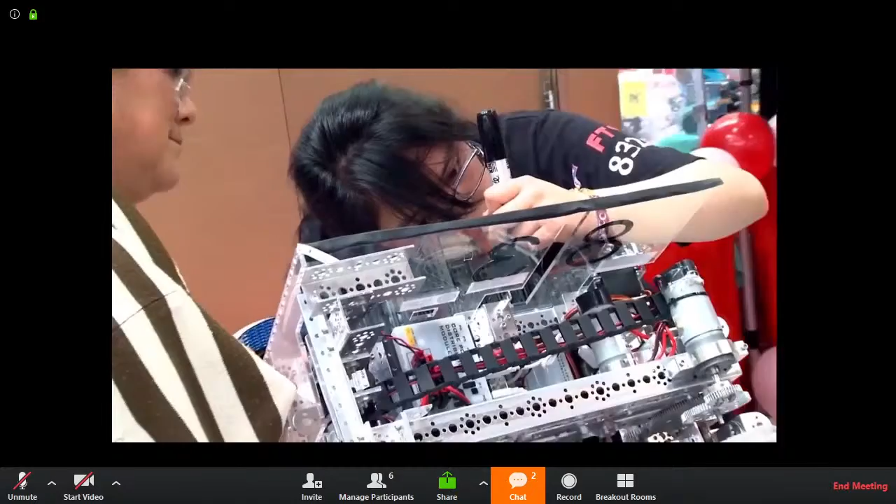In First Tech Challenge, students are developing a broad range of skills: manufacturing, hardware, troubleshooting, but there's also a lot of things you learn that you wouldn't necessarily think about - people skills, problem-solving skills, helping one another, helping other teams. The program draws so many students who just want to do marketing, who just want to do fundraising. You need to do fundraising because you need to buy kits and parts and everything you need for the year. That's a great thing that the kids learn very early on.

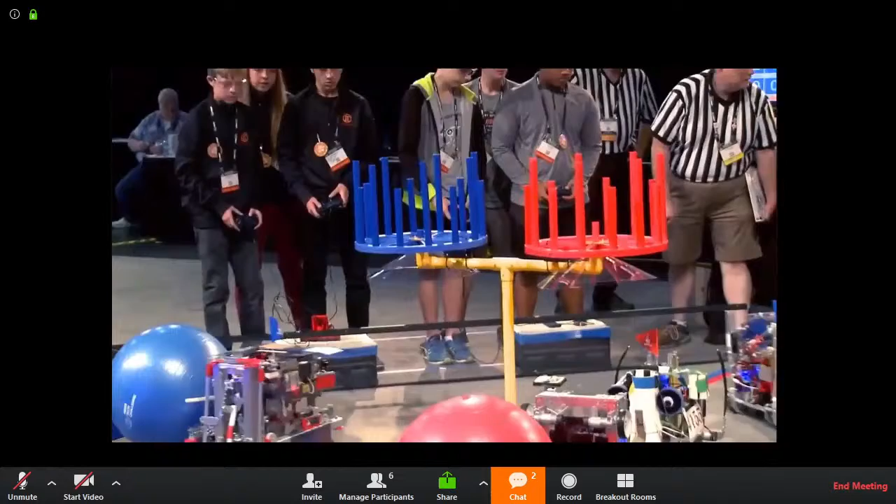The model of FIRST has provided incredible opportunities for students to interact with professionals. Whenever I ask my mentors a question, they always flip the question around and ask, where would you find the answer to that question if I weren't here? They slowly built my confidence up so much more to a point where we weren't asking them questions, we were just going. Each team has to compete at a local event, win awards at the local event, and then they're able to move on to the First Championship.

You walk into the room and there's that smell - the smell of robots. There's different languages, different culture. It's just the best thing ever. I think it's incredibly important for youth to see careers in science and engineering as a possibility for them. High school participants have access to over 80 million dollars in scholarships from colleges, universities, and technical programs. First Tech Challenge is one of 4 engaging FIRST programs. First, in one word: wow. Fun! First is inspiration. First is amazing. First is hope.

And now on to this year's game. It's called Ultimate Goal this year.

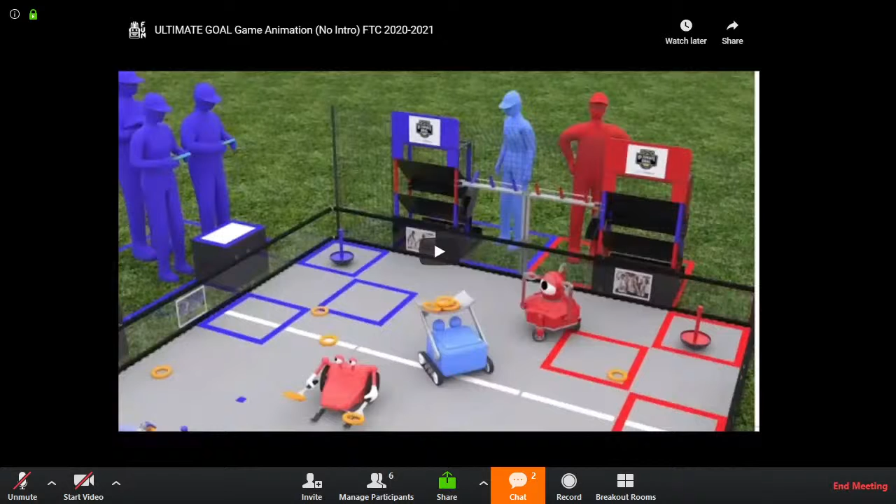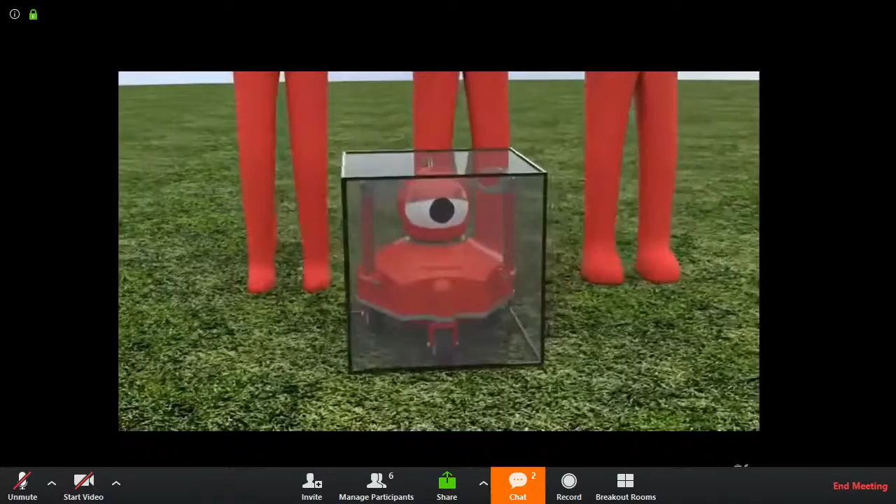A team consists of up to 2 driver operators, a coach, a human player, and a robot. The robot must be built from materials specified in the game manual and fit within an 18-inch sizing tool, but may expand after the match begins. Each match is played with 4 randomly selected teams, 2 per alliance. Each alliance is allowed only 1 human player. Your opponents for one match may be your partners for another.

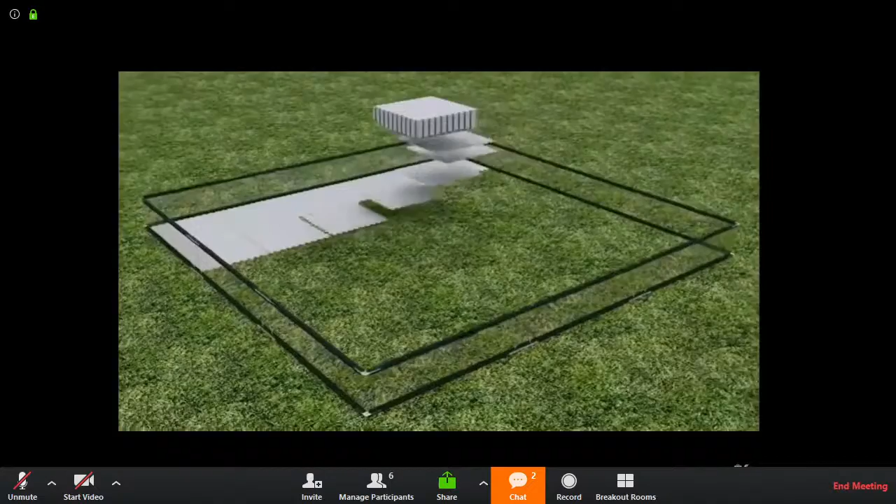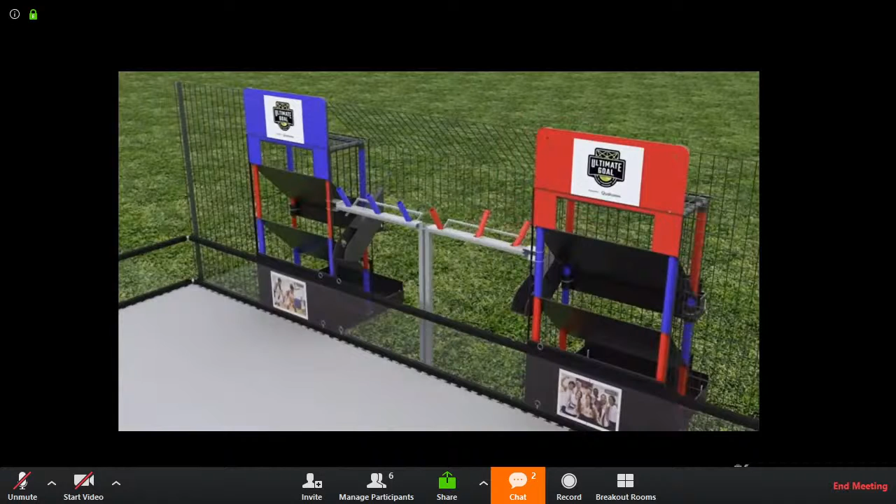The game is played on a 12-foot square playing field with a foam tile floor and 1-foot-high walls. 5 unique navigation images are located around the field perimeter. At one end are 2 tower goals, each containing 3 Alliance-specific goals with return racks. Between the 2 tower goals are 3 red and 3 blue power shot targets. There are 2 red and 2 blue taped start lines, and 3 red and 3 blue target zone goals.

A white launch line divides the field. Outside of the field walls are the 2 Alliance stations and 2 human player stations. The primary game element is a ring, approximately 5 inches in diameter and 3/4 of an inch thick.

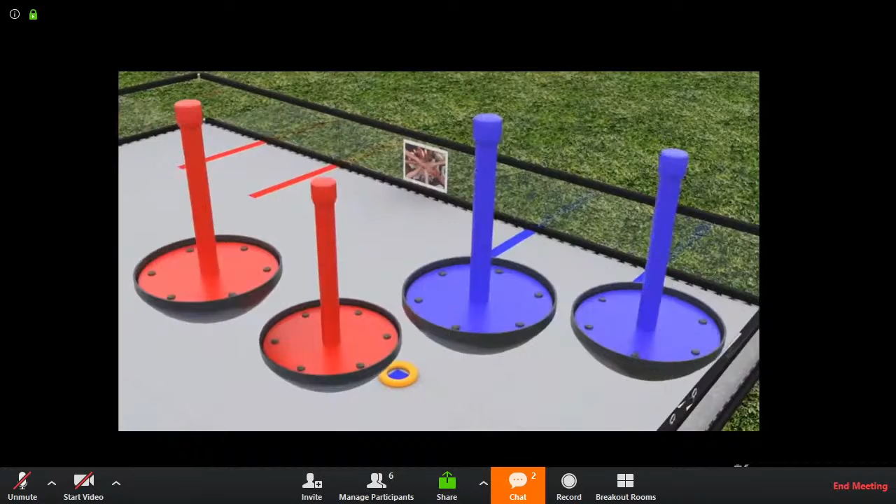A match is played with 20 rings. There are 2 red and 2 blue wobble goals. These can have rings scored onto them and can be moved for additional scoring.

Before each match, teams place their robots on the field, touching the front wall and over one of their Alliance's starting lines. Each robot must be touching or be in possession of a wobble goal. A robot may possess or touch up to 3 rings.

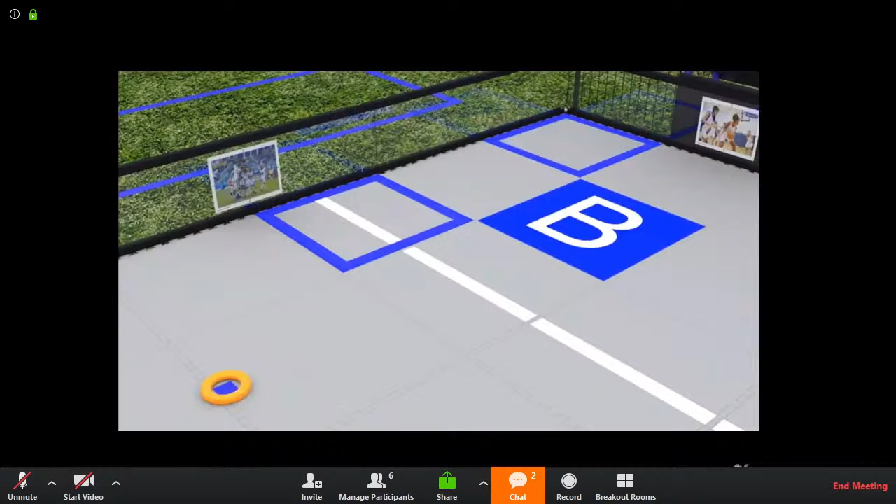After the robots are in position, field personnel will randomize the starter stacks into one of 3 configurations. This determines which target zone goal is active in the autonomous period. 0, 1, or 4 rings correspond to target zone goals A, B, or C, respectively.

Unused rings are stored in the human player stations to be deployed to the field at the start of the driver-controlled period. The players and field are ready.

Each match begins with a 30-second autonomous period. During this period, there are a number of ways for teams to score using only pre-programmed instructions and sensor inputs.

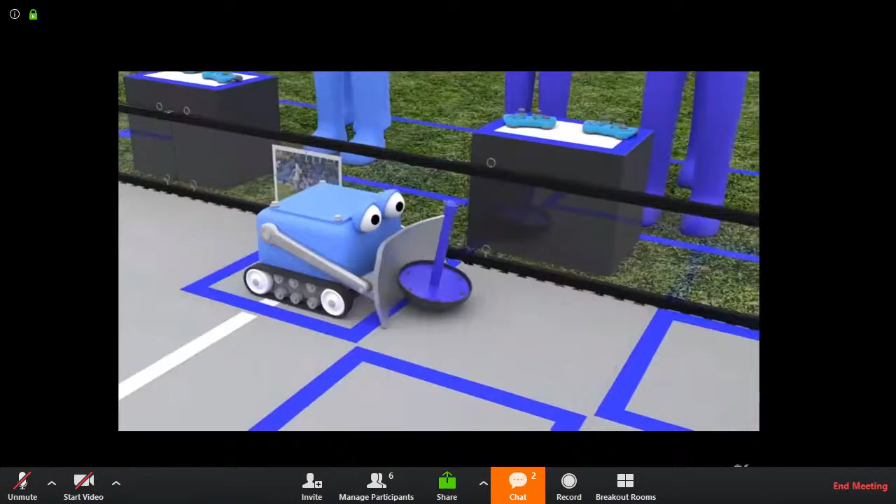Delivering a wobble goal to the correct target zone earns the Alliance 15 points. A robot parked over the launch line earns 5 points.

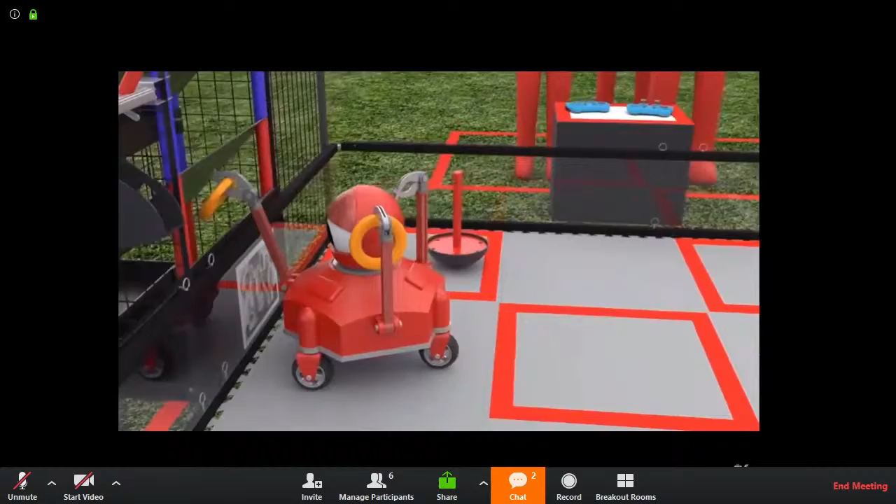Each ring launched or placed into the low goal earns 3 points. A ring launched into the mid goal earns 6 points, and launching into the high goal earns 12 points. Robots earn 15 points for each power shot target knocked down.

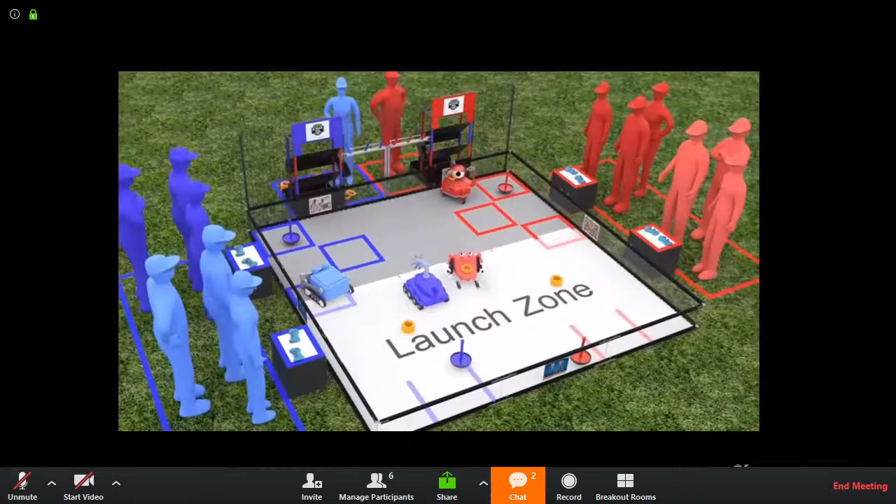Robots must be completely within the launch zone to launch rings into the mid goal, high goal, or power shot targets. Following the autonomous period is the 2-minute driver-controlled period.

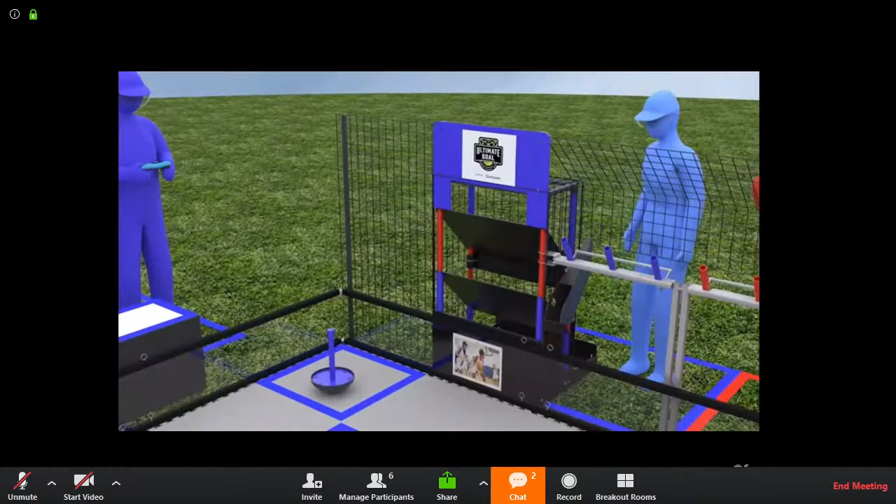During the driver-controlled period, human players are expected to return rings to the playing field, as well as reset power shot targets. Each ring launched or placed into the low goal earns 2 points.

A ring launched into the mid goal earns 4 points. However, rings launched into the opposing alliance's goal earn points for their alliance.

A ring launched into the high goal earns 6 points. The last 30 seconds of the driver-controlled period is the end game. During this time, robots may continue scoring rings, but there are also ways to earn bonus points.

Each knocked down power shot target earns 15 points. Returning a wobble goal to the start line earns 5 points. Each ring fully supported by the wobble goal earns 5 points.

If a robot lifts a wobble goal over the front wall into the drop zone, its alliance earns 20 points. There are many ways to score in Ultimate Goal, but there are also rules that, if not followed, will deduct points from your alliance.

For example, a robot may not block another for an extended period. A robot may not possess more than 3 rings at a time. A robot may not launch rings over the side or front perimeter walls. A robot may not intentionally tip another robot at any time.

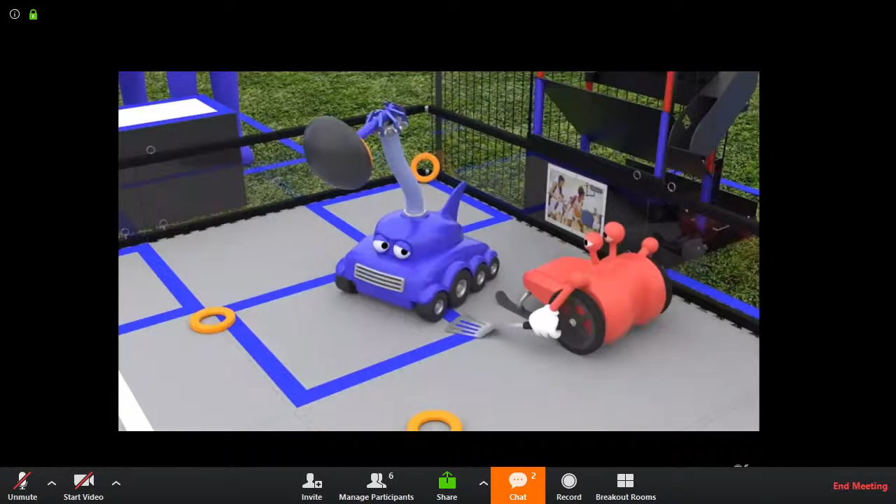This has been a brief summary of the Ultimate Goal game. For complete rules, please read the entire game manual and check the Q&A forum.

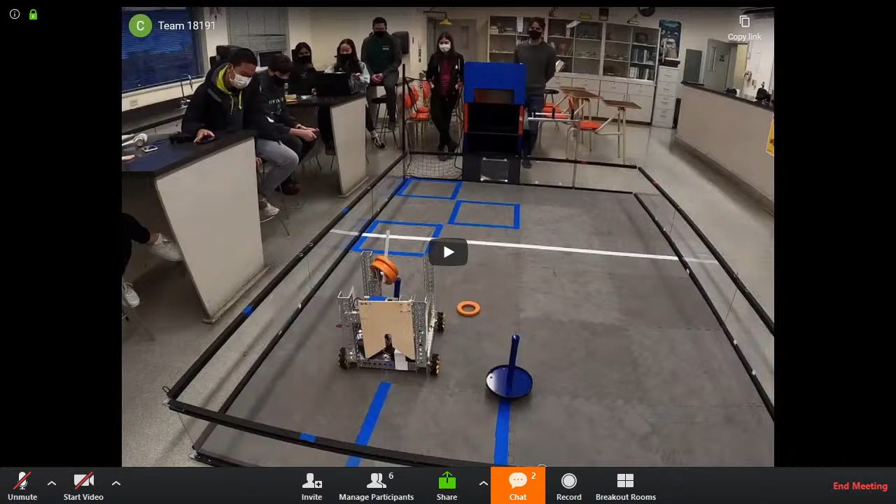Hi everyone, we are the St. Patrick's Incline Robotics team, and we are from Vancouver, BC. We are in grade 10, and this is actually our first robotics competition, and we had 3 weeks to prepare. However, we are proud of what we have accomplished. Initially, we had a lot of problems, so we designed a 3D claw to begin with, and that didn't work. Then we designed a wobble picker-upper, and that did not work also. But today, we were able to do a very good competition. A few of the things that we did well on is we actually got a way to place the rings on the wobble, and we are very proud of that. Overall, we are excited to continue in this competition.

St. Patrick's Robotics, we are inclined to win.

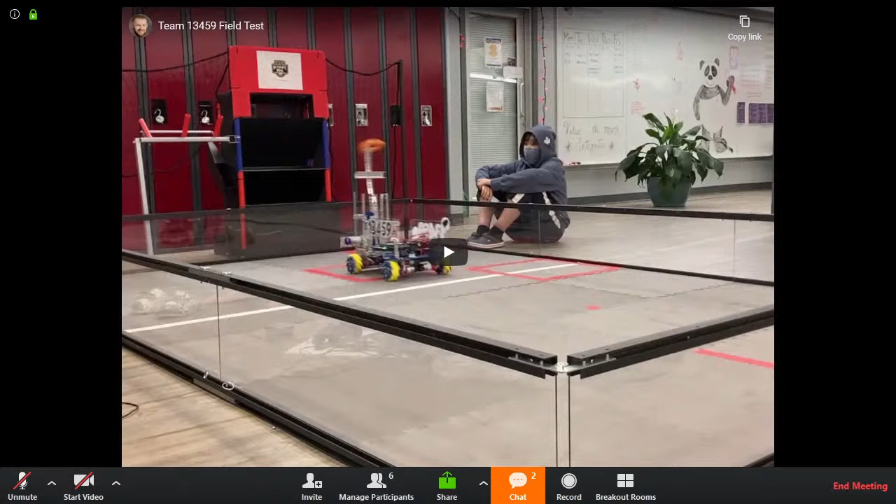So next up, we have team 13459 M.A.R.G.. They're from St. Margaret's in Victoria, and they've sent us a video of their autonomous program.

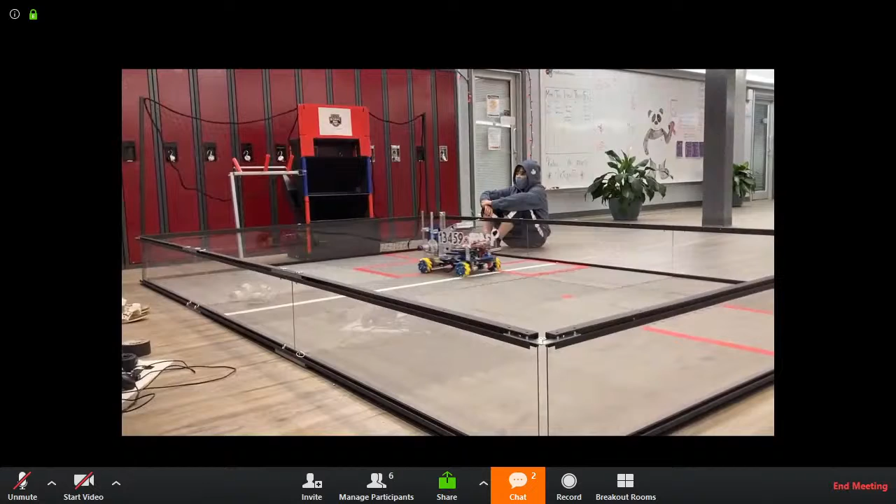That was a great and nice and simple autonomous program. Sometimes those are the best, just work every time they're supposed to. I wonder if they're able, though, to repurpose that arm mechanism and throw rings during the driver control period. That might be interesting to see. It also seems like they've got a good amount of maneuverability on that robot, and maybe they can push the wobble goals around during the driver control period as well and get that working.

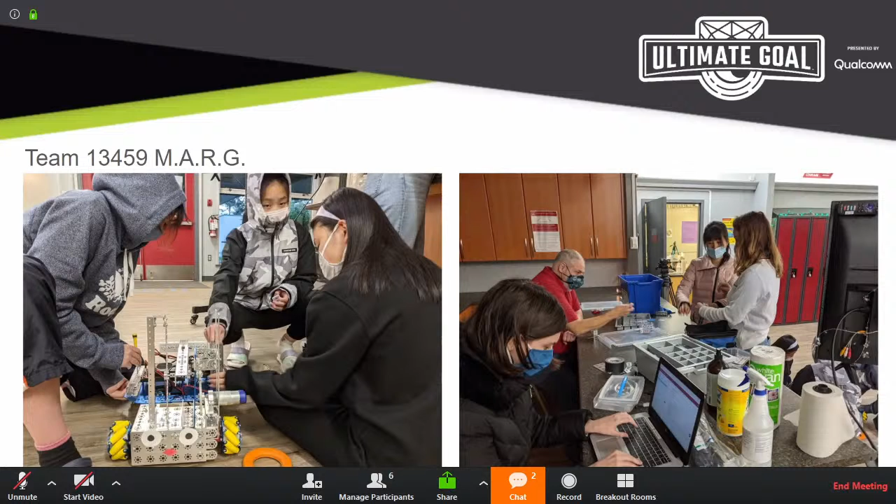We're excited to see what they develop and how their driver control strategy changes in the upcoming events. So next, this is Forces Unknown, team 16-67. They're a community team from Vancouver, and this is their 3rd year competing in FTC.

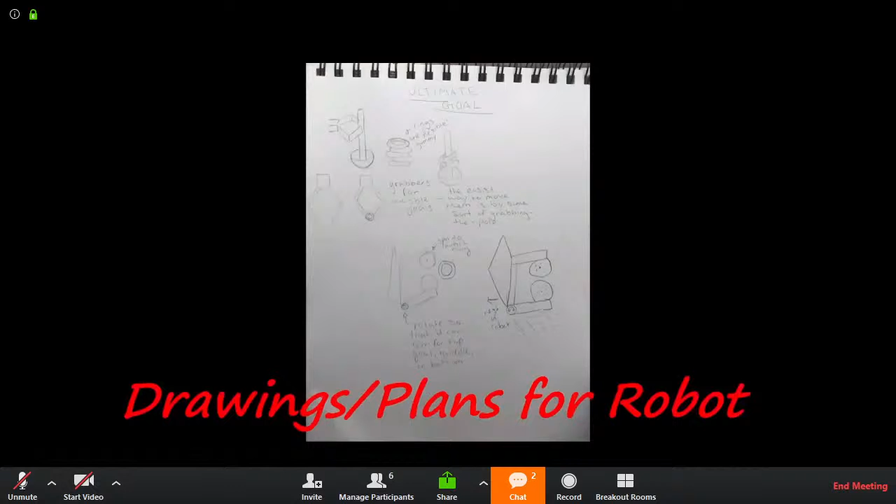This video is really going to show this team's development process for League 1. What's nice about it is they actually start from drawings that will come up soon, and then they'll take these drawings and move to actual CAD designs. We'll be seeing very specific and comprehensive showcases of basically what their mechanisms are going to look like.

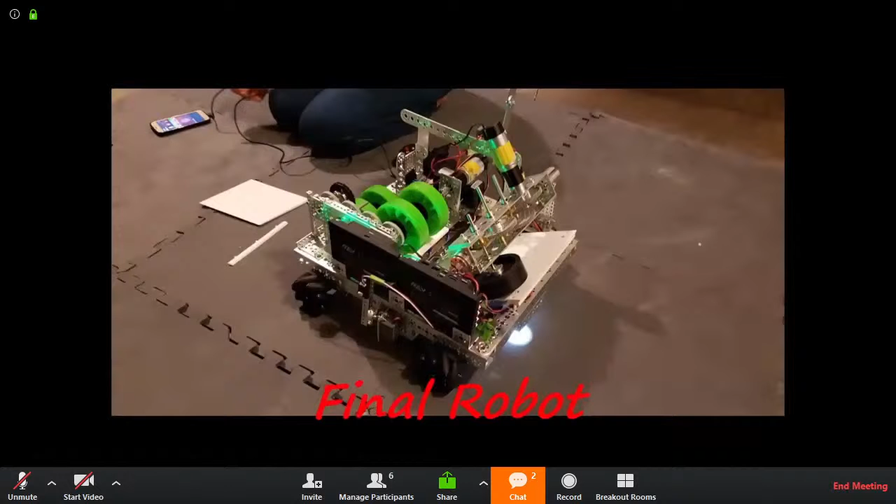Now the design and actual building process, which obviously there's going to be a lot of adjustments made. I like how the wheels turn green all of a sudden. That's a nice change.

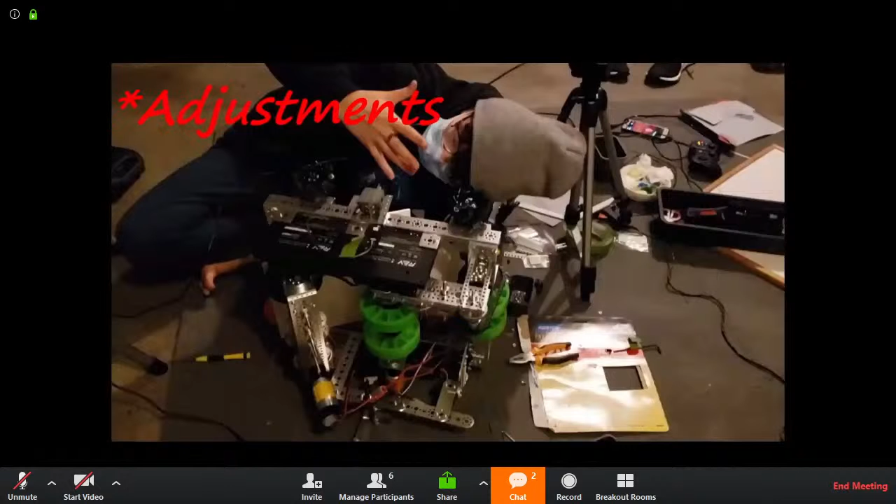Here we can see what everyone recognizes to be a staple of robot building, which is to say you have the final robot and then you have adjustments afterwards. But here it is, the robot's moving quite well, and you can see with the Mecanum wheel drive, it can turn and move and sort of strafe at the same time.

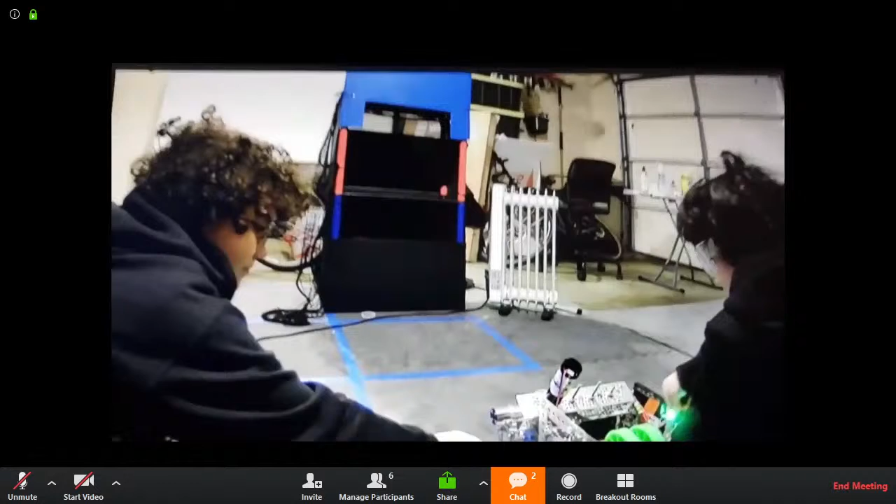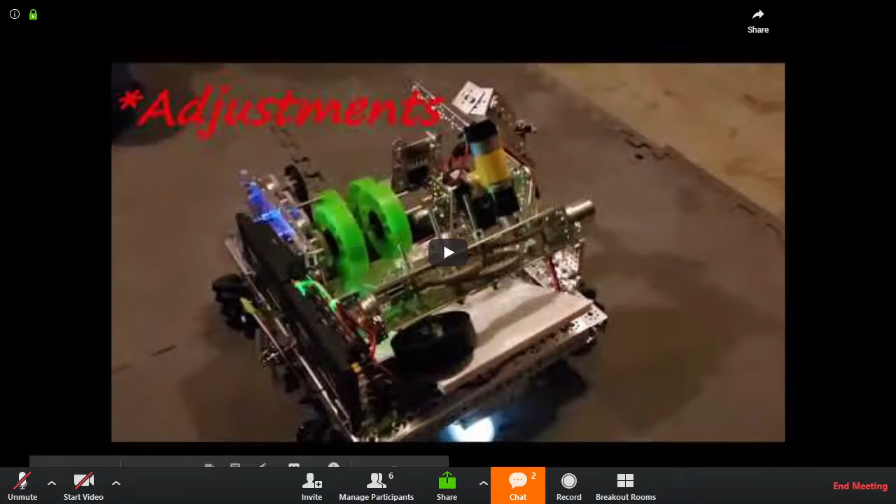And up soon, we'll actually be able to see the ring shooter in action. There we go. In addition to the shooter, there's actually a wobble goal grabber. Unfortunately, we didn't get to quite see it in action, but hopefully we'll be able to see it for League 2.

And so the next team we've got is Dudley's Troopers. They're from St. Margaret's School in Victoria, BC. The Dudley's Troopers are still working on their robot, and they're making good progress. We'll be excited to see them compete in more matches at League 2 in January.

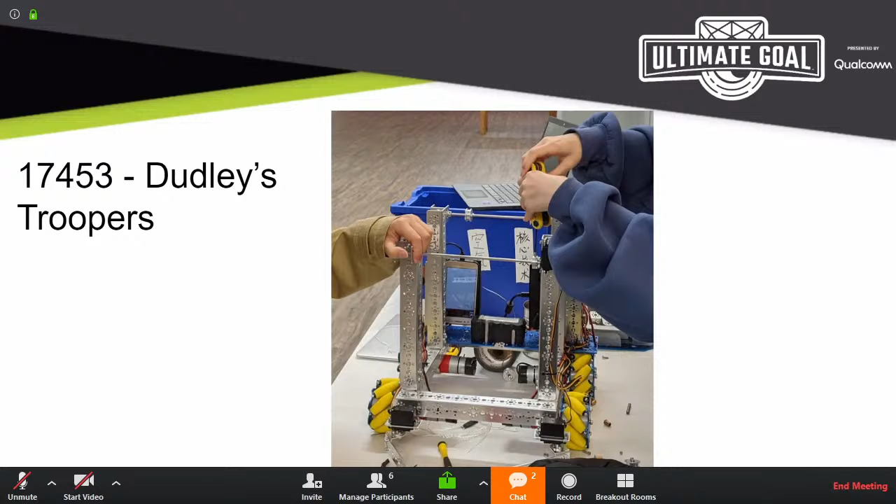So for many of you, this is known, but for those who don't, there are going to be many awards given out at the FTC BC Championship later on in the season. We thought this would be a good time to stop and talk about what each award is about and what are some of the requirements for each one.

So first up, Inspire Award, probably the most prestigious. This judged award is given to the team that best embodies the challenge aspect of the First Tech Challenge program. This means your robot design is creative and innovative, the entire engineering portfolio must be high quality and well organized, and the team shows respect and gracious professionalism to everyone they meet.

Then we have the Think Award. This award is about the engineering portfolio and the engineering notebook, and it's given to the team that best reflects the journey the team took as they experienced the engineering design process during the build season. So that means the engineering portfolio must include engineering content, such as the robot's underlying mathematics and strategy, and also capture a summary of the current status of the team and their robot design.

After that, we have the Connect Award. The Connect Award is basically about reaching out to the local STEM community and talking to mentors and industry professionals, and really just connecting with people who've done robotics in real life.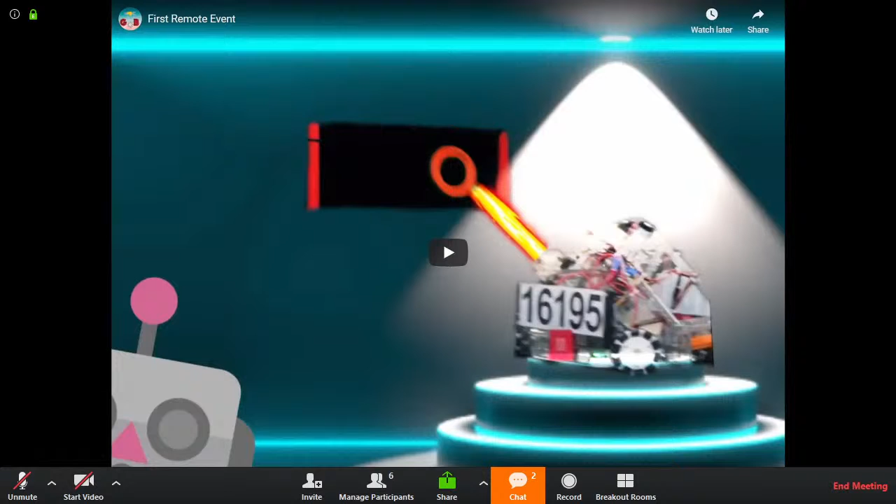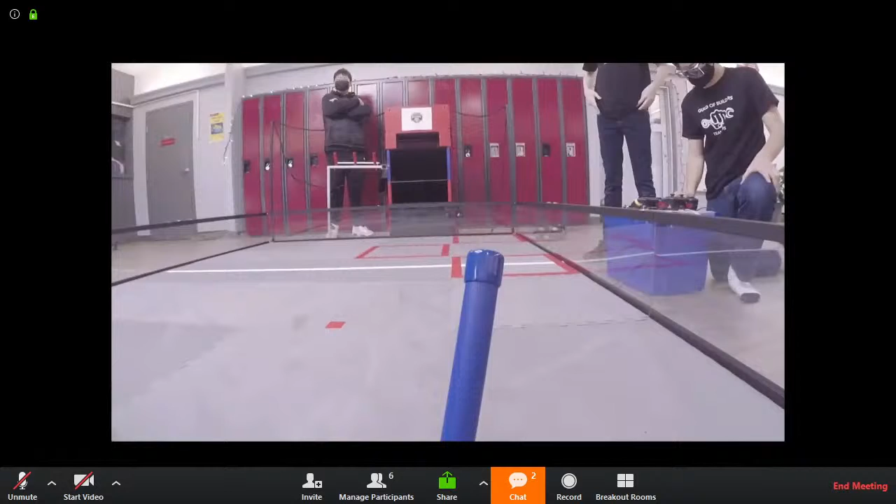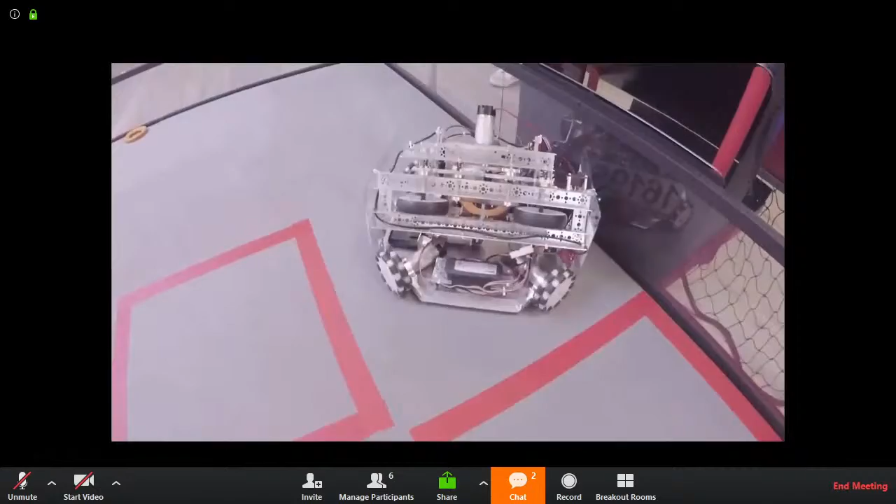Team 16195 is the Guild of Builders. They're in their third year with a 6-member community team. We're hoping that thing that looks like a cannon turret is actually part of the wobble goal being carried. Interesting features of the robot include Omni wheels for greater maneuverability. They have a shooter that's capable of scoring the lower goal, possibly higher. Floor collection of rings to feed the shooter. As you can see, their wiring is well done and organized. It's one dense package of powerful machinery.

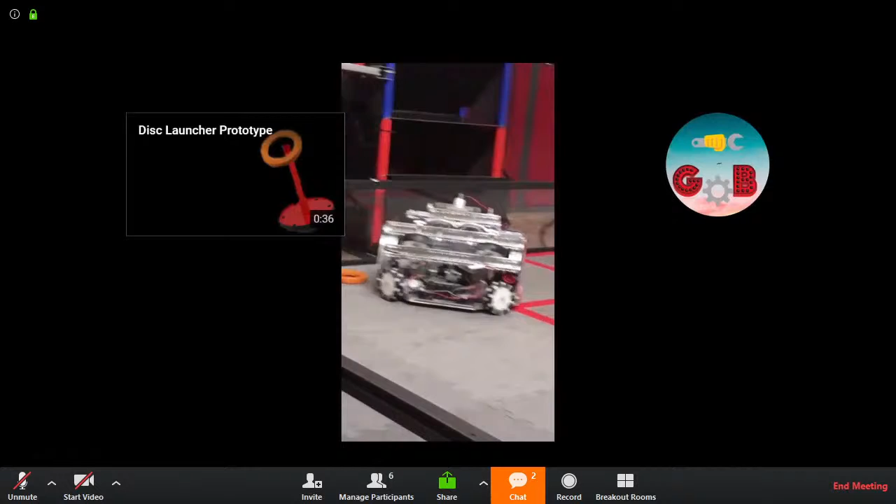All right, so next up we have team 18502 from St. Patrick's School. They are Marlo's Machinery.

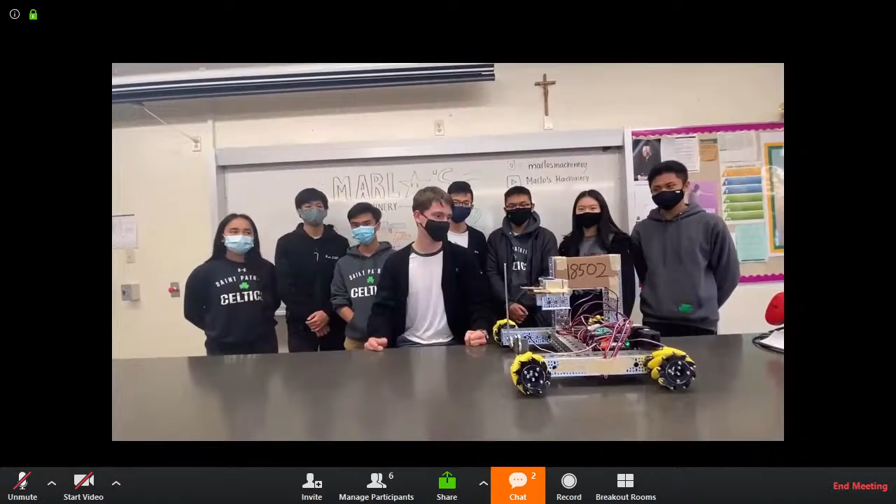Definitely a great example of having platforms for other teams to communicate with you on. You'll notice that this robot has mecanum wheels, allowing it to maneuver easily around the field, as well as spin on the spot, and an arm, which is currently holding a wobble goal. Hopefully we'll see it score that once they start the match.

This design may look relatively simplistic, but I would love to remind you that it is sometimes the most simple designs that are the most reliable and therefore easy to maintain and will work every single time. So never knock the reliable, simple designs.

And there it's going. Is it going to score the wobble goal? Yes. You may even call that a smashing success.

Team 18589 is St. Pat Celtic Silverfish, another first-year team from St. Patrick's with 11 members. They're using Mecanum wheels. They have a shooter which is optimized for the low goal. This team went in search of motors because they found their earlier motors weren't fast enough. This team has discovered the iterative design process.

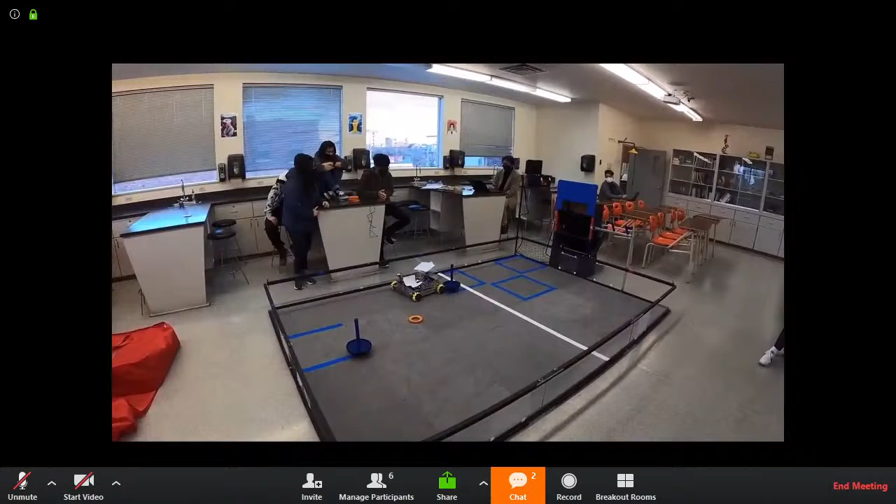So this is our first time participating in the First Tech Challenge, and we've learned how tedious it actually is to build a robot, but how rewarding it is to finish it and see it in action. For example, when we first got the robot to move and build the shooting mechanism, everyone was so excited to see it work. However, it didn't always go smoothly. Some of the challenges we faced were building and making the shooting mechanism. Originally, all of our motors were way too slow to shoot the rings. So, to overcome these challenges, we bought a faster spinning motor, and finally, we were able to shoot something.

For our next challenge, we hope to be more organized and prepared. We wish the best of luck to the other teams.

Sorry, I didn't know you're gonna pass it to Heather. You're gonna pass it to me, my hands are shaking.

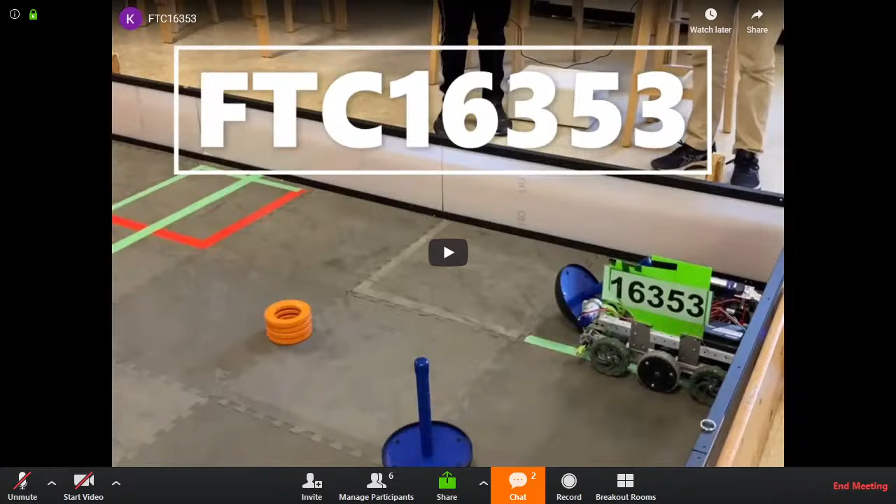All right, so next up we have team 16353, Reynolds Robotics from Reynolds High School. They have 5 team members, and this is their second year as a team. Let's see what they've sent us. 3, 2, 1.

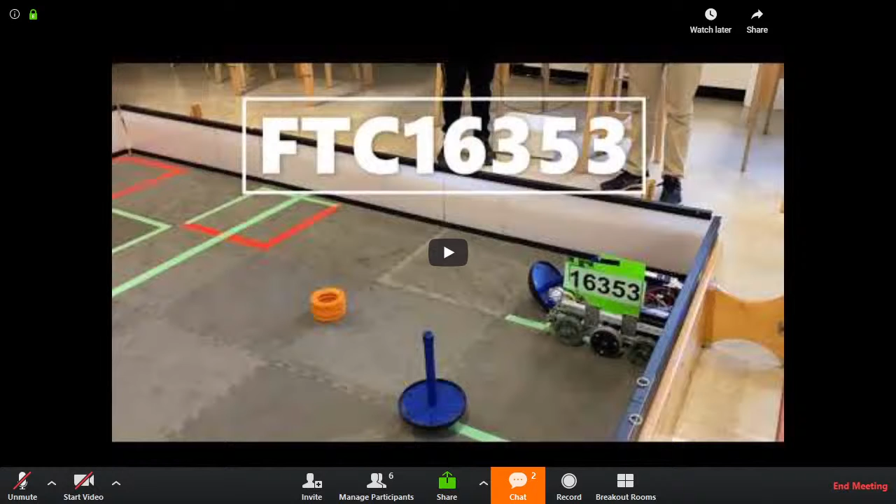That was one really fast autonomous and a couple of great ways to reuse mechanisms to be able to score the wobble goals. I really like how they can have one as a preload and still use the same mechanism to score some later on in the game. Great job, guys.

3491 is Team Fix-It, a team that dates back to 2009. As you'll see, this team's spirit is flying off the screen.

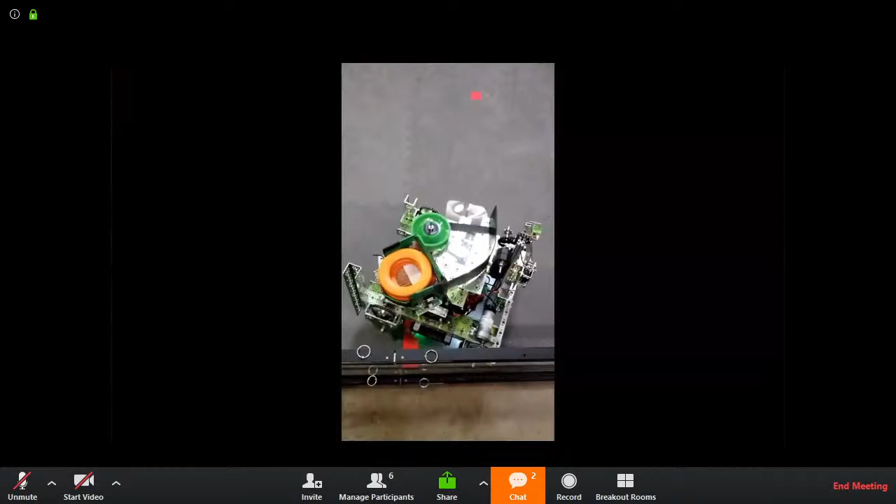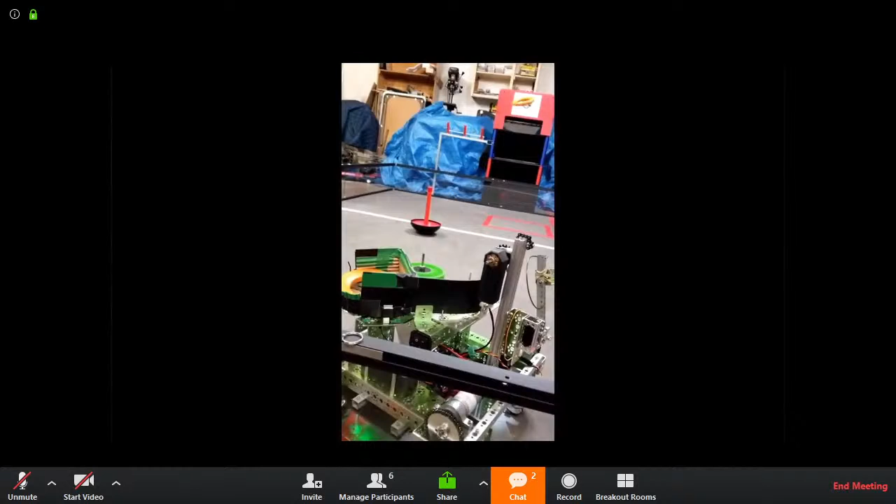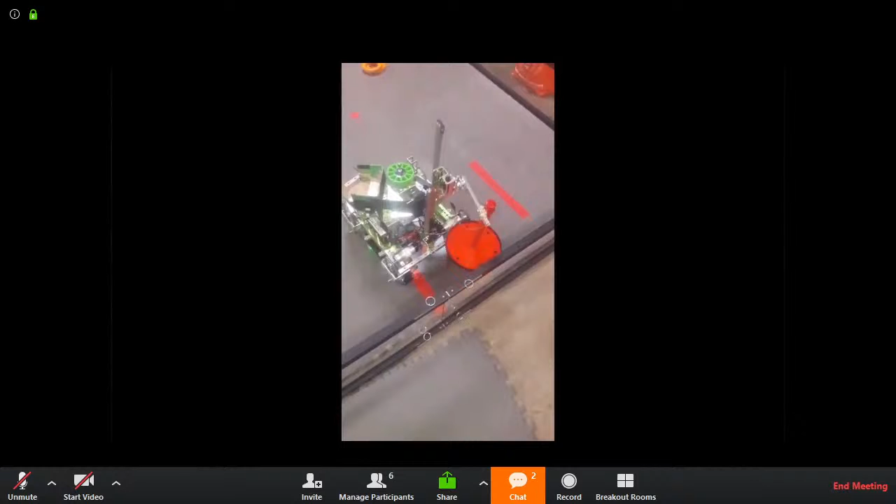In case you didn't catch it, our robot's name is Beyonce. She's a Mecanum-based robot chained at a 2-to-1 ratio. She has a flywheel shooter and a linear slide wobble grabber. The reason Fix-It chose the name Beyonce was because we wanted a robot name that relates to the game. There's a pretty famous song that's called Single Ladies, Put a Ring on It, that inspired us. The name Beyonce also gives the team a reason to bedazzle the robot.

A lot of us have had to make adjustments this season since we are living in a pandemic. Fix-It is fairly lucky that we have a small team to make this transition a little easier. So far there has been minimal in-person meeting time for building and driver practice, while most things such as design, strategy, outreach, and engineering connections have been moved online. We've made the most of it, and continued meeting regularly and connecting, just virtually. Some of the online activities we've enjoyed were group calls for chatting and playing Skribbl.io, team meetings, gaming, and playing D&D.

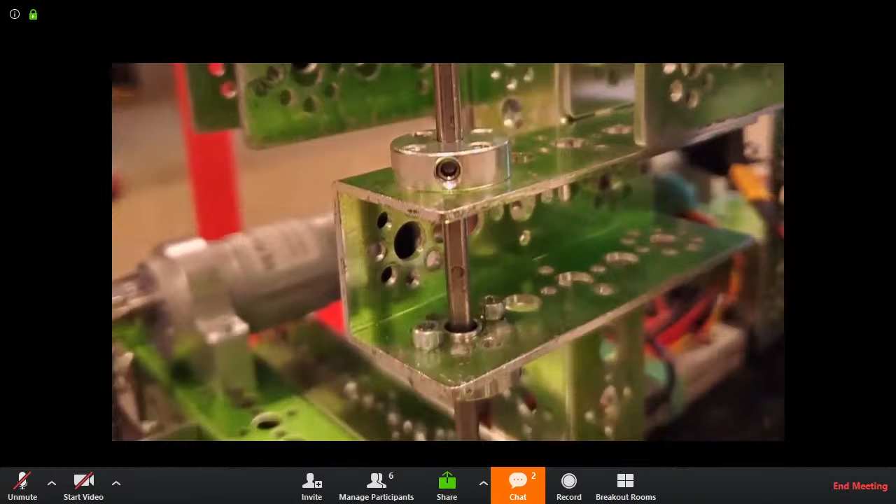So I'd love to see what type of range their shooter gets when there isn't a goal in the way, because it was shooting from all the way at the back end of the yard.

Okay, so as many of you know, every season and every year of FTC, the game changes. And with each new game, new strategies arise, and it can sometimes be difficult to navigate around these new elements that you might be facing. So we figured now would be a good time to ask an expert, in this case Kath, some questions about how to deal with these new game elements and where they might have showed up in the past in FTC.

So one example of this would be the rings that we're trying to shoot into the goals of different heights. Kath, how long has it been since there were launched elements like the rings in an FTC game? Well, technically Rover Ruckus was the last year that had launched game elements. Most teams were encouraged to place the scoring elements in the lander that year. Thinking back further, you're probably looking at Velocity Vortex, which was 2016, 2017.

I'm actually really excited to see how the teams deal with the foam rings because they're more flexible. In most previous seasons, the game elements are made out of hard plastic, so that softer foam material is going to be interesting to see how they handle them and make sure they don't damage them. Right, and these rings are also being used for setting up before the autonomous period.

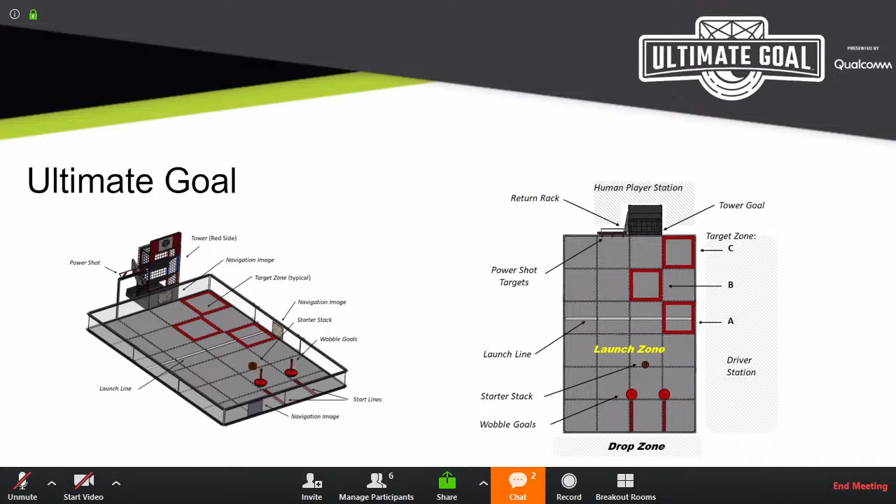The team that is 5th in the rankings is team 18840, Reynolds Robotics. They're another rookie team with 3 members, so let's watch the video.

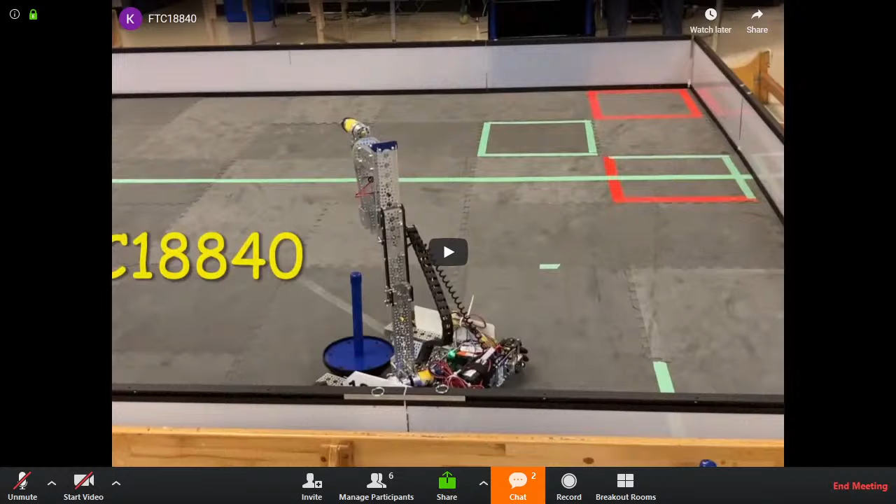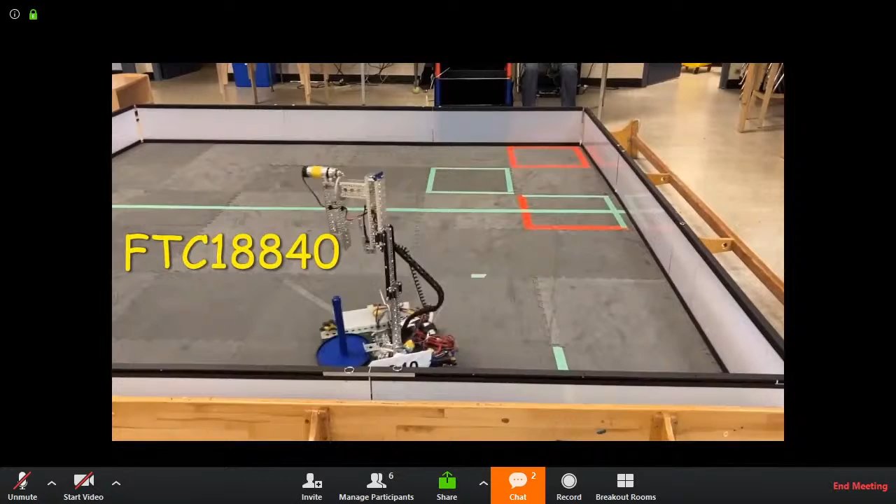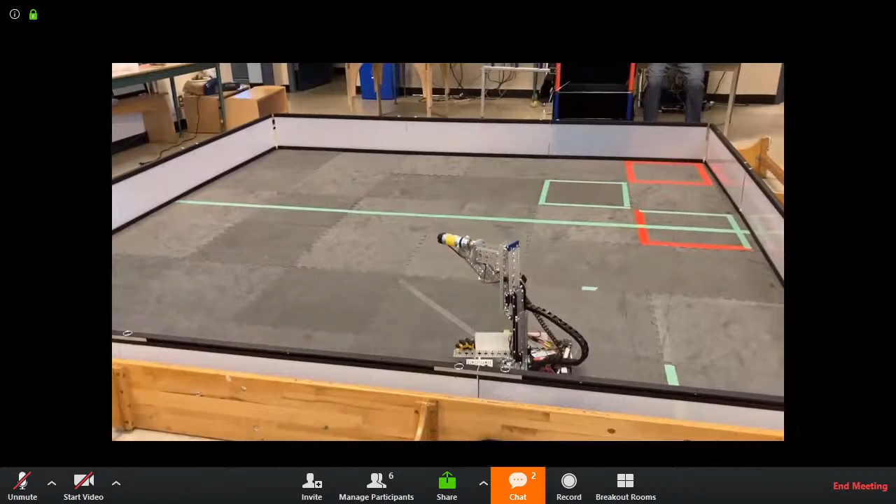I like their use of mecanum wheels to be able to move around on the field and spin on a dime. That is definitely one of the most sophisticated robot arms we've seen this season. I like how they're able to use it to pick up and pour over the side barriers - that's a very clever design. I look forward to seeing if in the future they decide to deal with the rings in some way, to build a shooter or find some way of scoring those, maybe even with the same mechanism, if they can find a clever way of doing that.

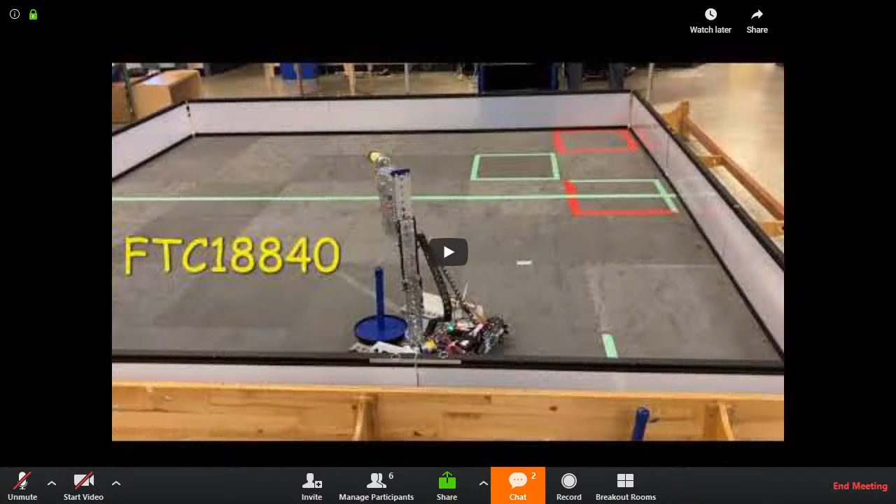Autonomous Innovative Mechanisms, or AIM for short, AIM Robotics, is a community team from Coquitlam, and this is their 2nd season competing.

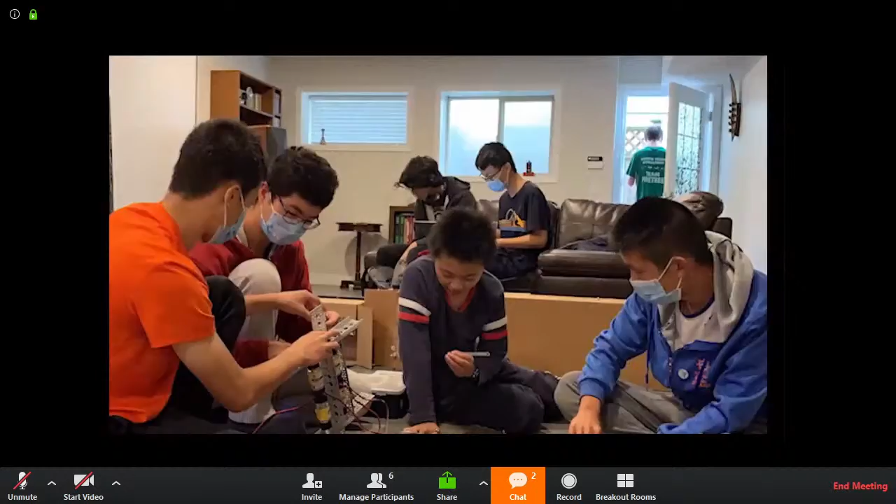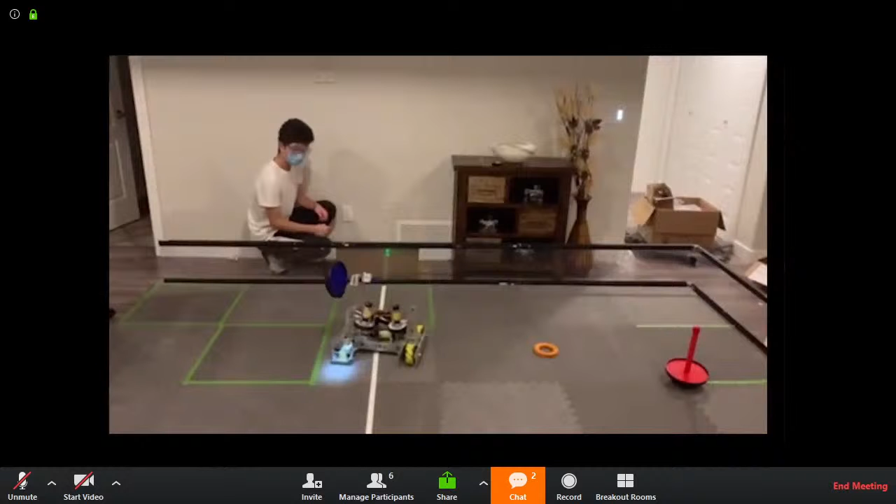What we're going to be seeing in this video is a fairly good autonomous program that senses the randomized starter stack of rings and correctly navigates the wobble goal to the correct target zone based off of that. So here it's placing that in target zone C, I believe. It's target zone B, but very close. Oh, all right, one off.

You can see that they have fairly good control of the wobble goals, and they will actually be using that also for endgame to push them out into the drop zone.

Okay, that's 2 wobble goals dropped. So that's a pretty successful endgame.

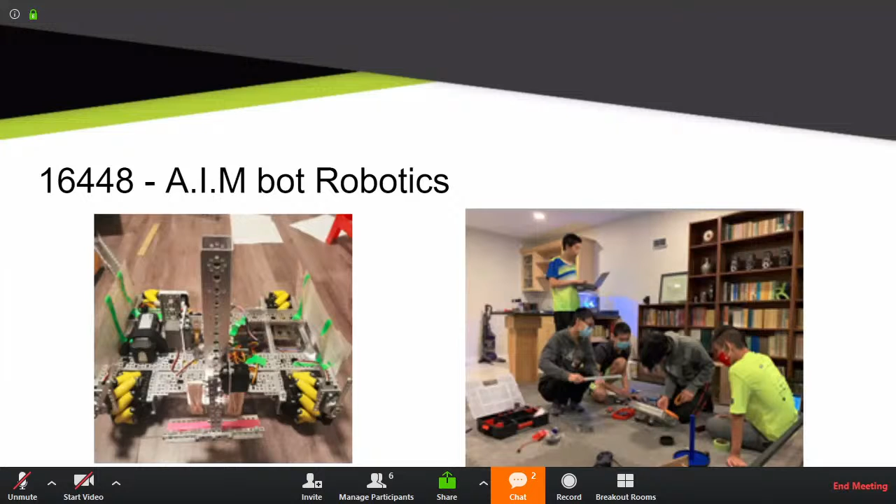So team 16031 is Parabellum, a returning team with 7 members. Their robot uses a single flywheel design and has a nice device to collect rings from the floor. This team has made an impressive use of CAD for prototyping and design, very helpful when your team can't meet in person. Let's play their video.

Hi, we're Team 16031, Parabellum. We're a returning team this year, but with all the unprecedented changes, it feels like we're rookies all over again. One of the things we have done to adapt to these new circumstances is to move our weekly meetings online. The intention behind this is to reduce our in-person physical meetings as much as possible. This means that a lot of our work has been done virtually and independently. As a result, we have begun to rely heavily on designing and prototyping through CAD software such as Tinkercad and Fusion 360. The first of the 3 technical highlights we want to showcase in this video is our shooter.

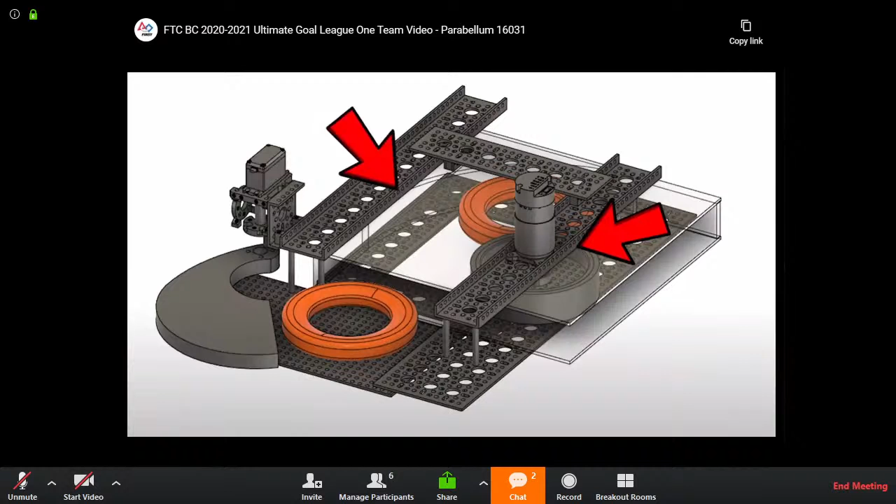This is our same-side shooter that uses a motor-driven wheel called a flywheel in the center of a curved pipe to propel the rings. So for League 1, we're going to be preloading 3 rings into our pedestal holder. Then we're going to have another servo-powered arm that will push the rings into the flywheel, launching them towards the high goal. Secondly, we wanted to up our navigation game by using odometers, which track the relative position of the robot on the field.

To do this, we needed to design a new odometry holder, which accommodates a small wheel and a chunky REV encoder. This is to be mounted on the underside of the chassis and be able to absorb shock as we drive around. And to finish, we have our ring intake.

Our current prototypes are using rubber rollers like those found on your typical household Roombas to move rings up to the shooter. These rollers are connected to each other by a sprocket and chain and are powered by a single motor. At least that's the idea. This preseason, we've had a lot of opportunity to experiment, but not all of our ideas became a reality, so we're working hard to achieve our goals, and we hope you anticipate our future games. And now we've unfortunately reached the saddest part of this video, the end.

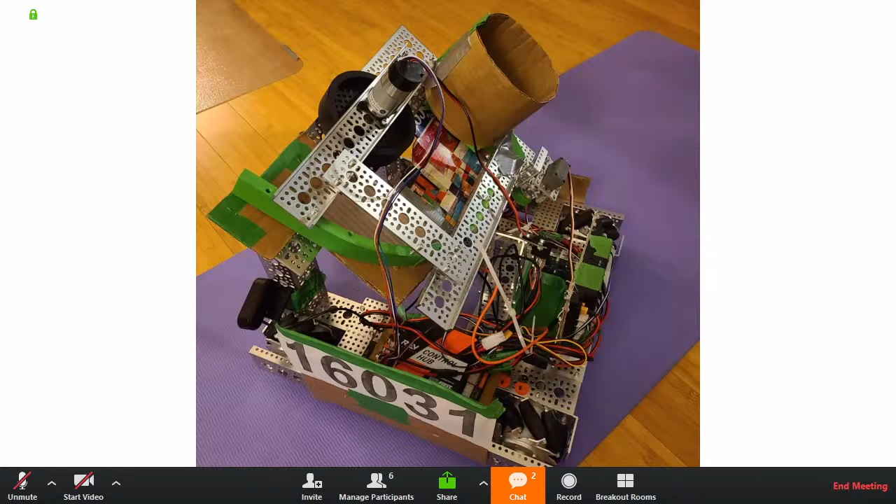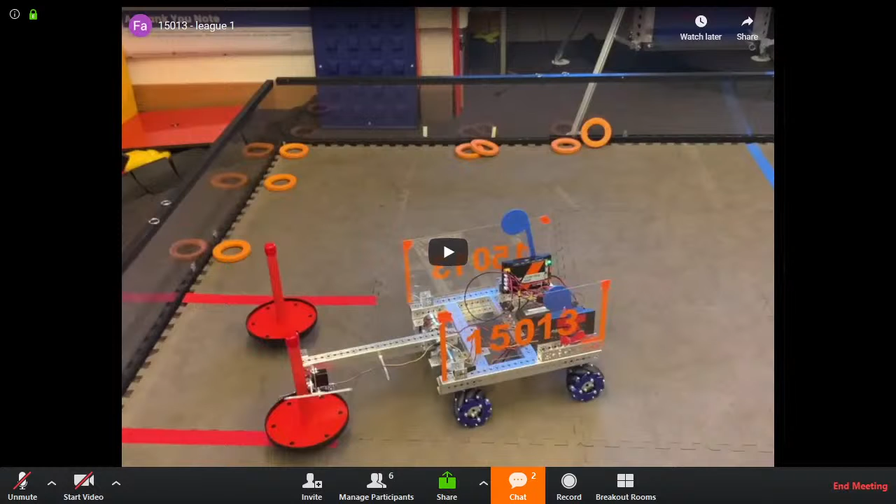So next up, we've got our second place team, 15013 Friction from St. Michael's University, and this is their 3rd season competing.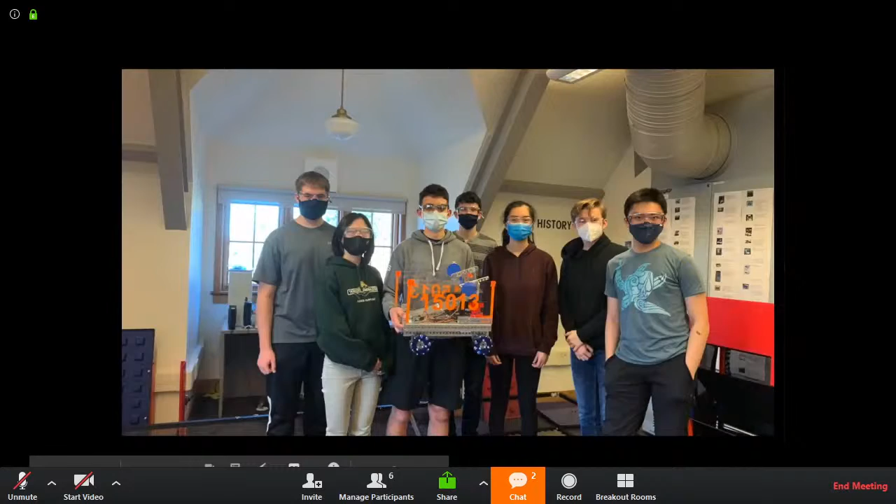So you can see here that they had a really simple autonomous program that just drove forward to the target line and got points. And now they're doing a great job of picking up rings and scoring them in the goal.

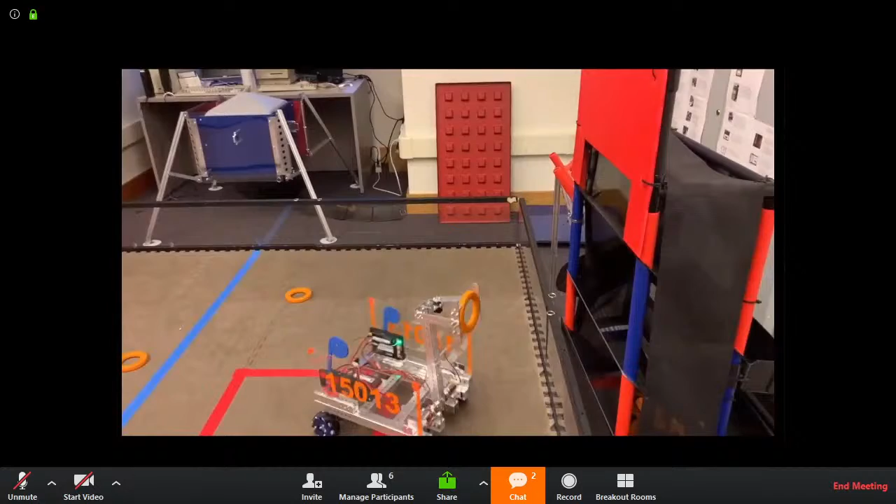And I think what we're going to see now is they're picking up the wobble goals and getting them scored over the field. That's actually a really good use of mechanisms, getting to have the same mechanism be used for different tasks on the field. That's a often hard thing to design in.

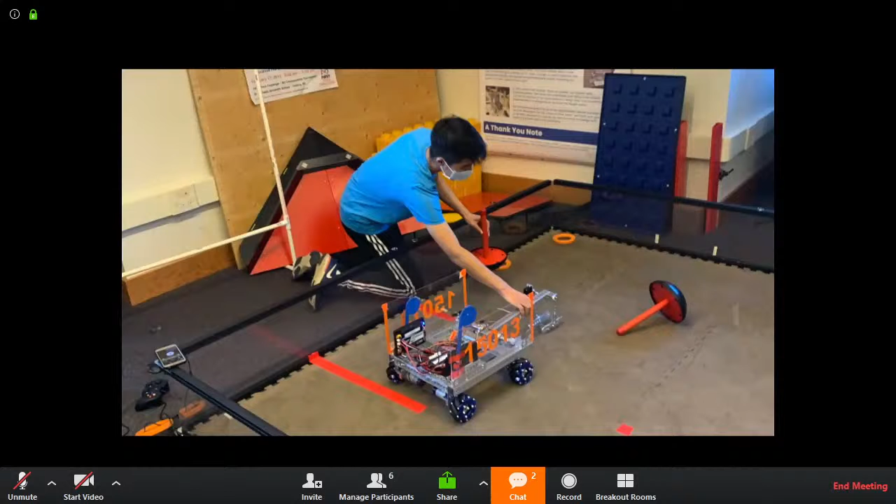Got some photos here of their team process in fixing their robot.

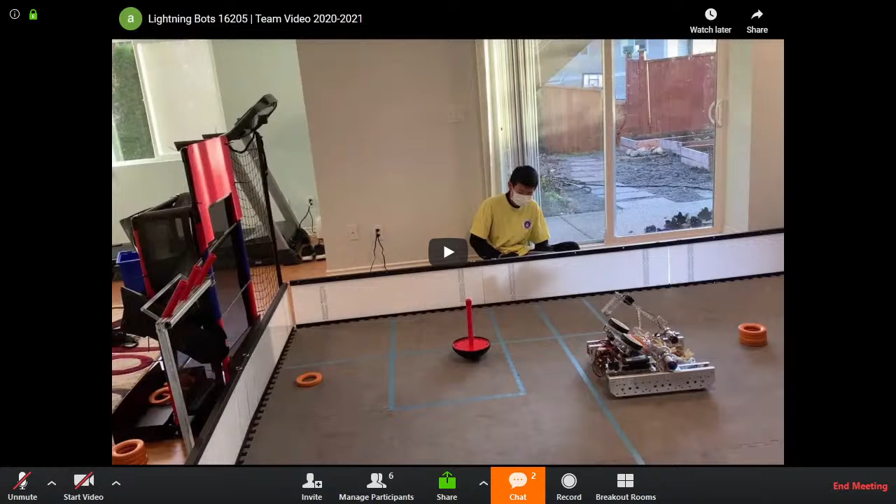And now the team that is so far in first place is Team 16205, Lightning Bots. This is their second year competing. They're a homeschool team from Coquitlam.

Hi, my name is Jerry Ma. I'm one of the main builders of the team. Now, in the robot match, I don't do a lot, but off match, I'm the one who checks the robot.

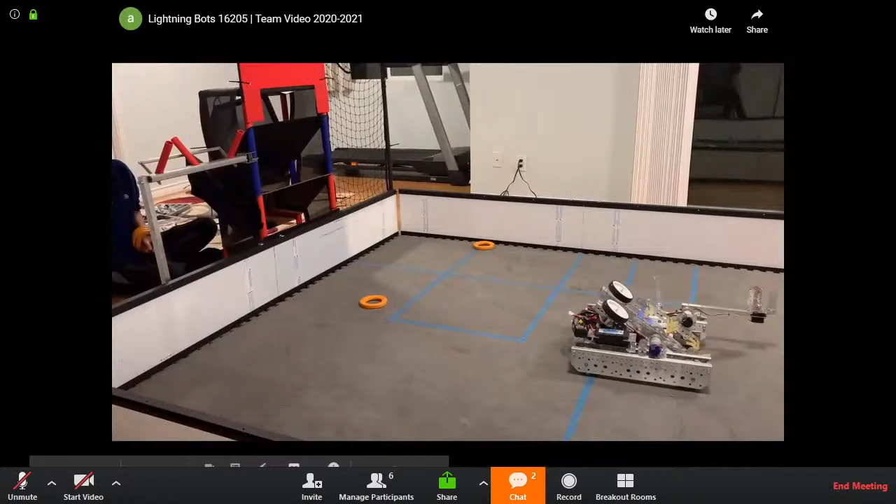Hi, I'm Charles. I'm one of the programmers for the team, and I mainly program autonomous. I'm also the human player and the tool manager for the team. Hi, I'm Henry. I'm one of the main programmers for the team. I coded our driver control program, and I'm also a secondary driver.

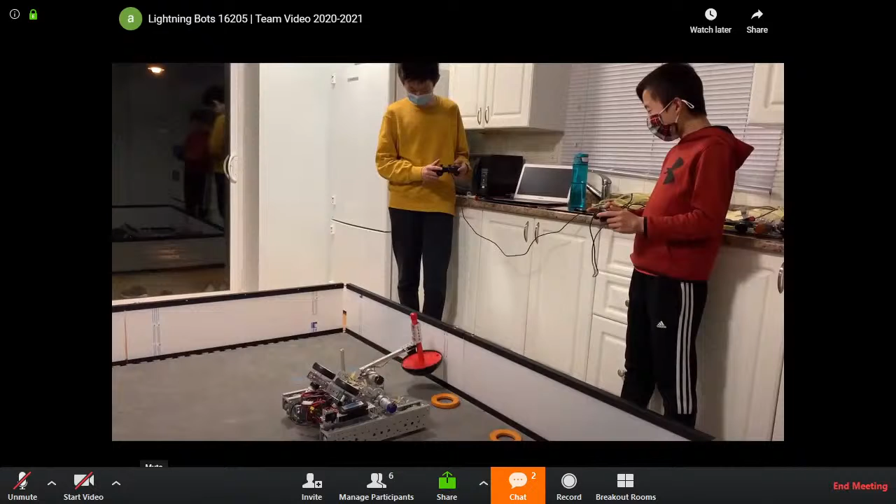Hello, I'm Bruce. I'm the main driver and the builder of the team. I designed the intake and the shooting system.

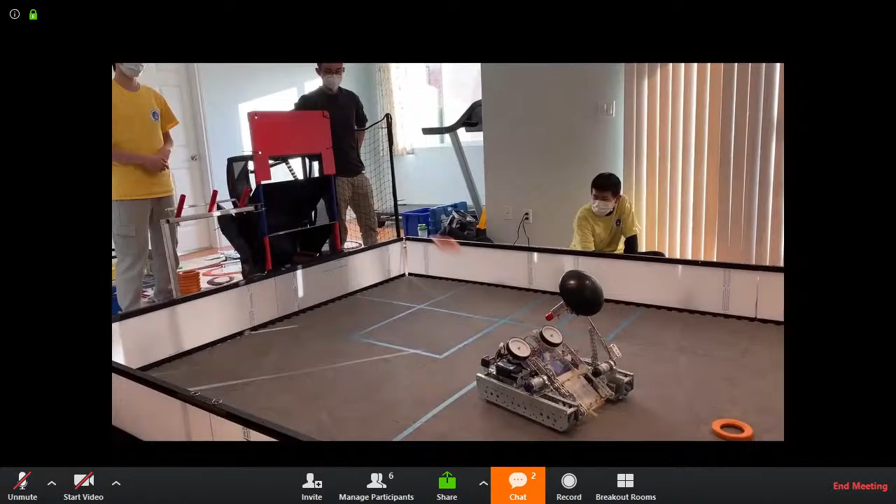Wow, that's a really cool shooting mechanism, how they can adjust their distance from the goal in order to adjust which one they're trying to score into. And I think that arm on the side is going to be used for the wobble goals, which is pretty cool. Very reliable mechanism. That's impressive. That takes a lot of time to do.

Yep, and they picked up a wobble goal. Maybe we'll see them score before the video is finished.

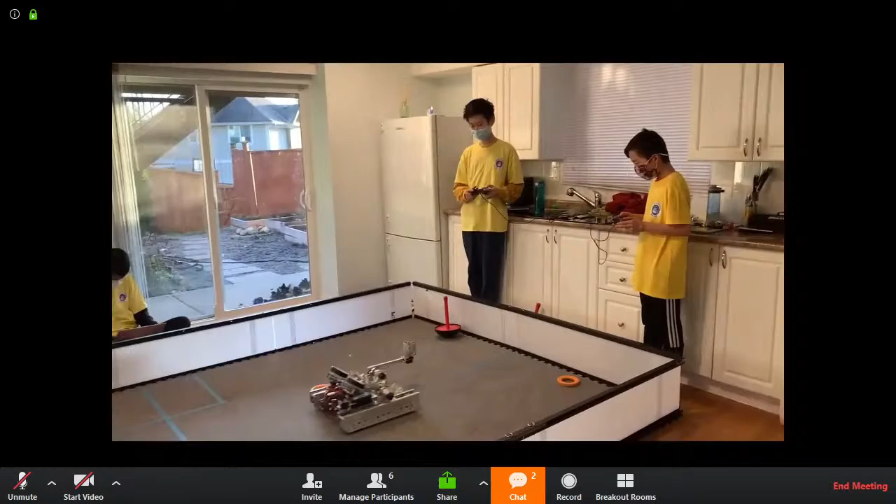Oh, they can adjust where they're shooting while they're going. That is very impressive.